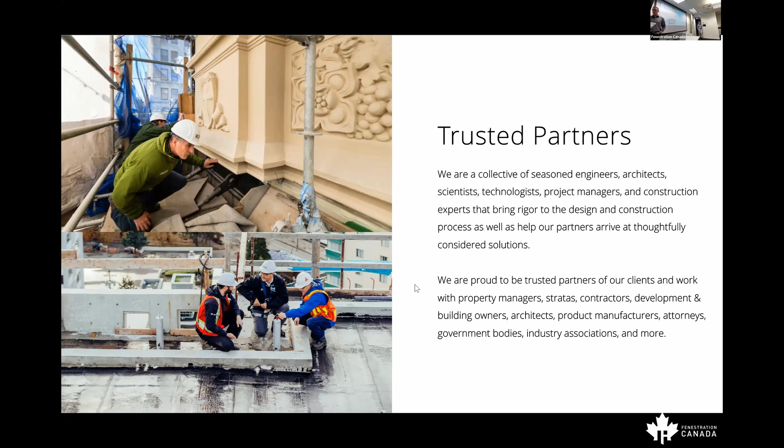And construction experts that bring rigor to the design and construction process. We are proud to be trusted partners of our clients, working with property managers, stratas, contractors, developers, building owners, and so forth.

Our capabilities range from historic preservation, deep energy retrofits, building enclosure engineering, structural engineering, capital plan reports, depreciation reports, energy and sustainability analysis, construction litigation, research and forensics, facade engineering, and facade structural services.

So we believe in innovation and expertise at RDH. For construction project management, we utilize a team of experienced construction managers and site superintendents to ensure the smooth implementation of a construction project.

For deep energy retrofit projects, we use our passive design approach to create energy efficient buildings, and a well-installed, airtight enclosure reduces the need for heating and cooling and improves occupant comfort.

We are regularly called upon to assess and clearly explain building enclosure and other building science failures. The high level of building science expertise at RDH leads to many requests for us to provide expert investigative reports and testimony as part of the litigation support role.

We collaborate with you on renewing specific building components or conducting targeted or full building rehabilitation and upgrade projects. We have the building science and construction management expertise to lead you each step of the way.

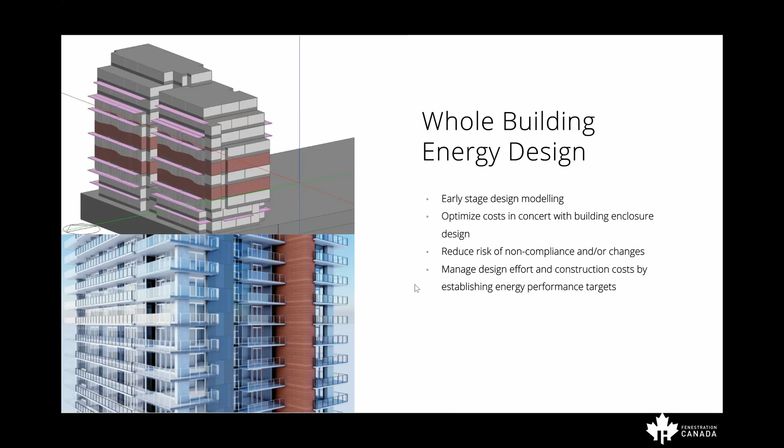RDH has dedicated lab spaces, which allow the ability to test and vet new materials and systems, as well as develop building-specific systems. RDH works with many of the major material manufacturers.

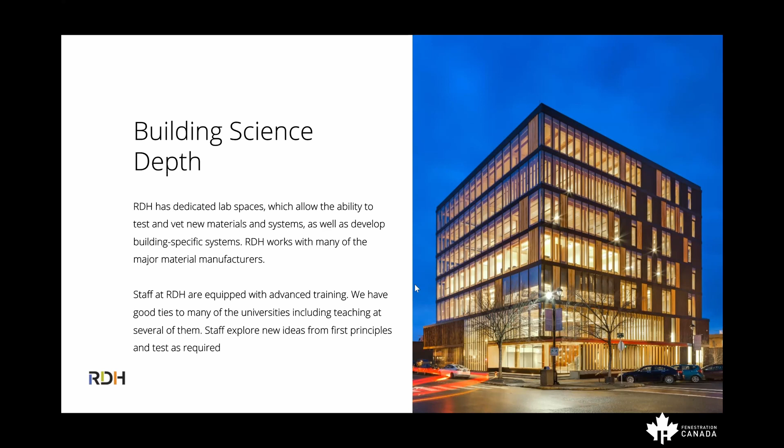Staff at RDH are equipped with advanced training, and we have good ties with many universities, including teaching at several of them. Our staff explore new ideas from first principles and test as required.

Whether the facade is built with cladding, curtain wall, glass, stone, masonry, or other materials, RDH offers consulting services and technical advice that makes architectural ideas and concepts come to life.

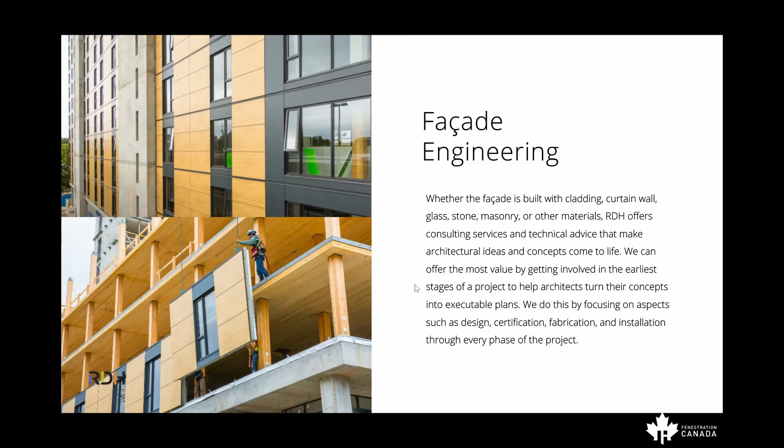We can offer the most value by getting involved at the earliest stages of a project and helping architects turn the concept into executable plans. We do this by focusing on aspects such as design, certification, fabrication, and installation through every phase of the project. We work directly with glaziers and manufacturers to undertake structural design of the fenestration system. We prepare structural engineering and thermal calculations, as well as review shop drawings to ensure compliance with building codes, design documents, and specifications.

We also help in the development of current codes and are authored on many of the technical guidelines and documents like you see here.

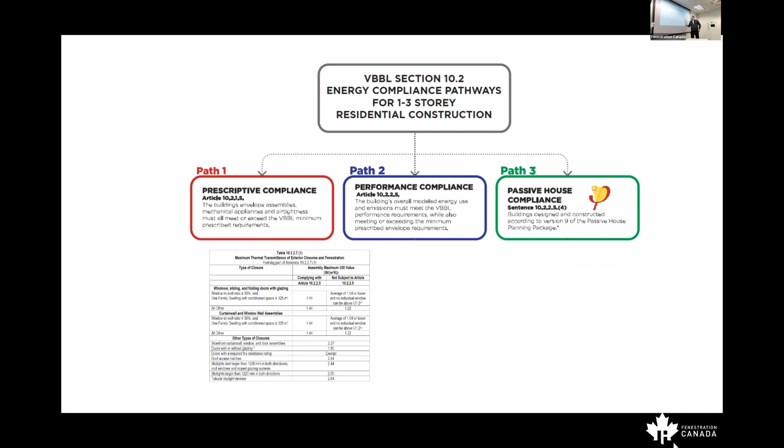So what do we do? I'm going to hand this section to you because this is where we get into the technical weeds, and as you guys will learn quickly, I have just enough to be dangerous, but we have some professionals. I'll just go back to one. Yeah, I want to go back. So go back. Nope. I just want to point something out. One more.

What is a conflict? What's the definition of that? A discrepancy, or when one's stating a solution or an option that's in direct opposition to the other. That's what I would say. So if you know what those two paths say and what their directions are to work, if you don't know that, there's already a conflict.

Like, I'm trying to understand when you would go, hey, there's a conflict here. If one contradicts the other. And that's kind of actually where this conversation starts, because as you're right here, the applicable requirements of Part 8 of the NECB and the City of Vancouver Energy Modeling Guideline, that was in the code in the 2012 code.

It was just in 2018 they added this little line. What I think unfortunately became the reality is people only read the City of Vancouver Energy Modeling Guideline and said, well, that's telling us what to do. So it's now the governing document. Let's forget everything else that is written.

And I said, that's like an iceberg. You're seeing the top of it, saying we're only going to look really hard at the top. As long as we're far away from the top, we're good. And then, yeah, so that's the problem.

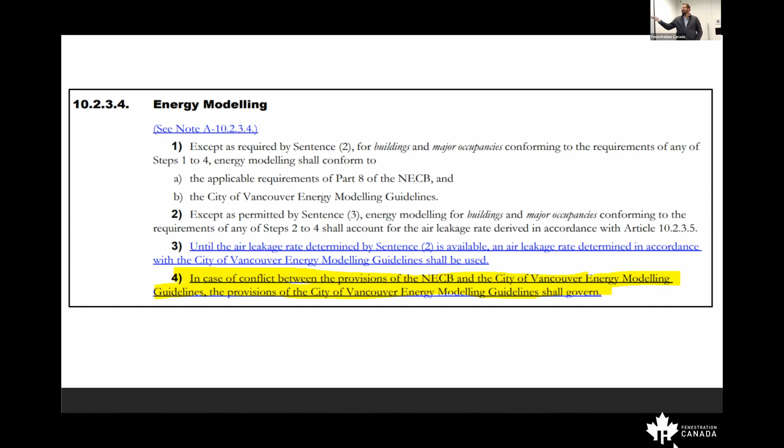In all reality, there's very little conflict, and it's trying to decipher what is the actual conflict that ends up happening for fenestration, because this is not fenestration alone. This is everything, right? So yeah, our biggest issue right here that came up for us.

So a little history on Layton. I know a lot of you know us, knew my dad back in the day. So in 2011 we had the first inquiry about thermal, one of the first kind of like, do you guys know anything about thermal? We started having modelers in 2013.

We eventually decided to become an NFRC simulation laboratory, so we actually do certification simulation for NFRC and for manufacturers. And it was this abandonment of the NFRC standard size. My thought was, okay, so everything points to things being NFRC or CSA approved. We've got buy-in from the good guys in the industry.

We're consistently fighting - might be too strong a word - but clarifying what those values represent versus other European models, or the results of those values. So we have buy-in for this, and all of a sudden the language is like, we don't care, get out of it. There were emails passed around asking for clarification from people in the city, and basically the city's like, well, we're not the law, we're not going to tell you about NFRC 100, but yeah, it should be size specific.

And so it really opened up this can of worms of, well, why do we do NFRC? And I think that's what got that first paper going. And then if we do decide that there's value there, which I think there is, it's validated, it's third party acknowledged, everyone's playing in the same field.

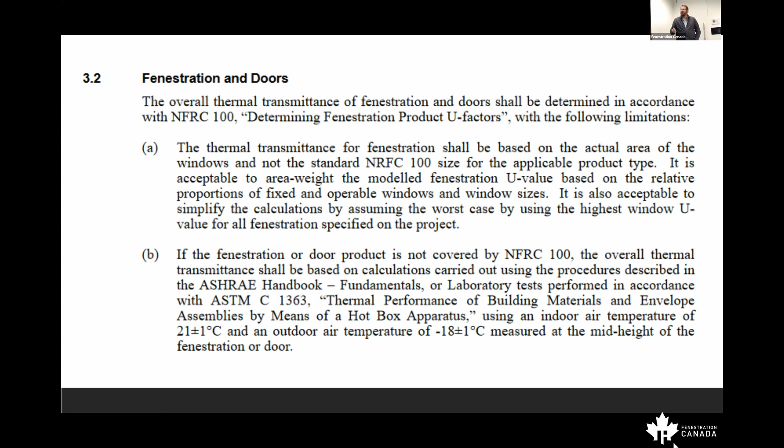We'll go through a little bit of the history of it. For those that already know everything, it'll be some review, but this really is a working paper that came out of the task group we put together with Fen Canada. So yeah, this made me laugh as soon as I dug into it.

And then I also did a review of what was happening before we had this huge explosion. I think what caught people off guard the most with the City of Vancouver Energy Modeling Guideline - I don't remember whose project it was, but I think it was Anton, Centra had a project in Victoria, and they're like, got to meet the City of Vancouver requirements. And he's like, it's in Victoria, why do I have to do that?

And then they brought up the BCBC, and it's like, yeah, by the way, it's part of code. You are required by code to meet this requirement.

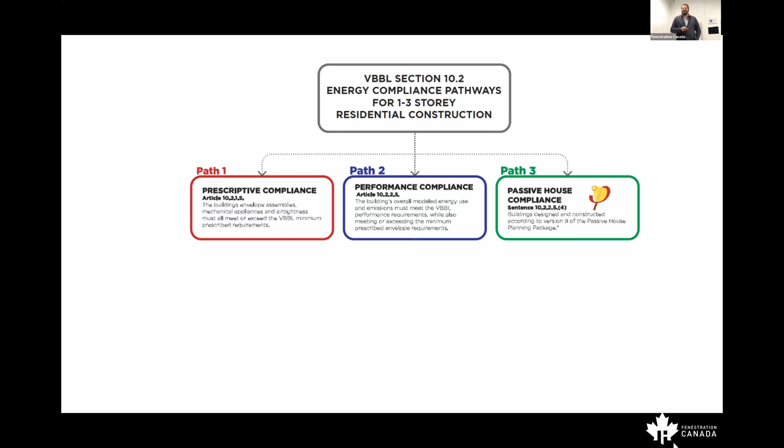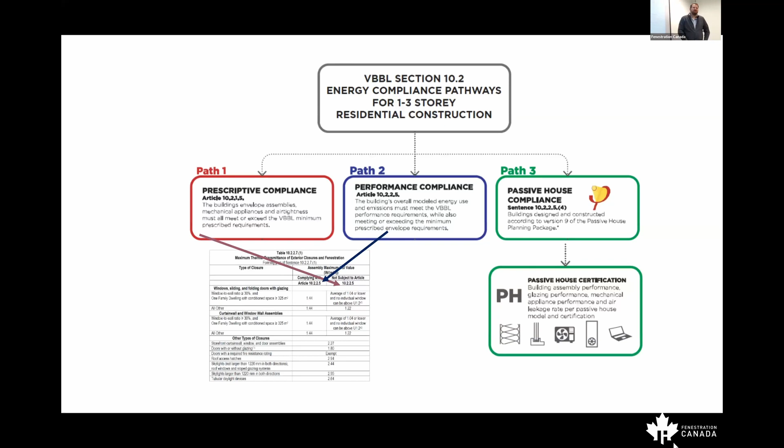So in the past, we had methods to pass. When I first got into the industry, there was what I'd call a threshold model, a prescriptive method that said, just tell me what my label needs to be. I want to install this window, tell me what my value needs to be, and we'll put that particular window in.

We saw triple glaze, I think in reality, become a very quickly adopted system because of that. It was like, we want to lower the overall labeled values so that people can install.

Then we had this performance conversation come in, and the VBBL really had these very clear paths. If you wanted to install a window or door, this was your threshold model. You could also use performance compliance, which was like the beginning or leadership of integrating with energy modeling. And then there's also the passive house route—as long as you're actually getting a passive house certified building, go ahead and use passive house certified products.

So we get to this, and all of a sudden it's just like, no, I don't care. I remember forwarding this to somebody, and they said the wording in VBBL is like proposed solutions in VBBL—it's not like this is the rule. So I'm like, so then the VBBL doesn't even comply to the City of Vancouver Energy Modeling Guideline? How is that the case if that's what they're putting out? So it was all really confusing.

And at the same time, I had this very interesting project that opened my eyes to how bad of an experience it could be. This is one of those West Van Part 9 homes, just barely under being a Part 3 building. Originally, I saw the actual original design.

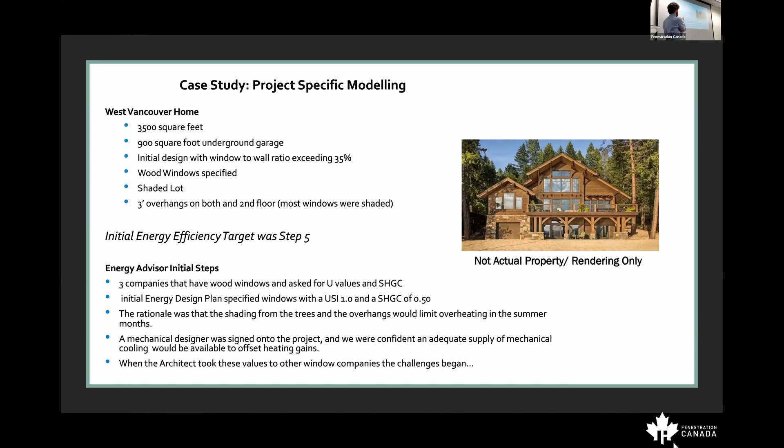Well, that's part of the problem—it was evident that it was based on some European modeling. One of the things I've talked to several people about, and it's not the purpose of this presentation, but separately, is why European values and North American values are so different—you can't get this seesaw effect. The way we use the metrics, as modeled in the NFRC program, and CSA being totally harmonized, they come down and go up fairly linearly.

So what this ended up being was several iterations of models, changing out glass. We have to get a higher solar heat gain—can we try double glazed over here? Just bent on getting this step 5. And finally, after about a year, this project is being closed up now—I started it May of last year. This was a Part 9 home.

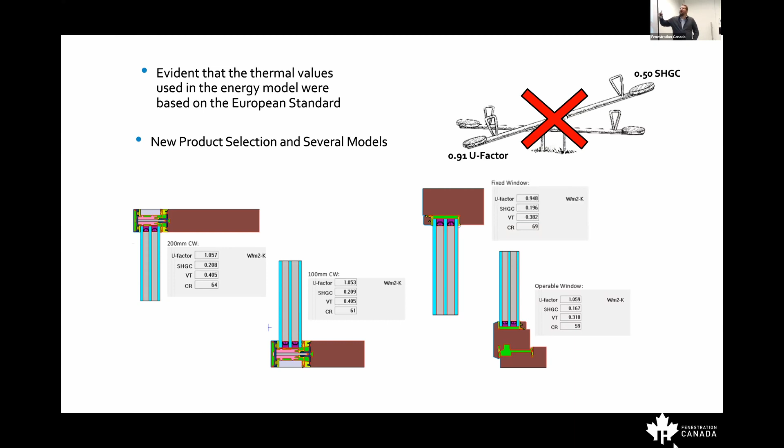And I just sat and I said, you either are going to lower your window to wall ratio, which they inevitably actually had to do, or you're going to have to change something in the envelope, because I can only give you so much. And they had these funky ideas with wood. I'm like, wood already performs really well. There's only so much you can do. And so to run all these models over and over again, it was several thousands of dollars and months of work.

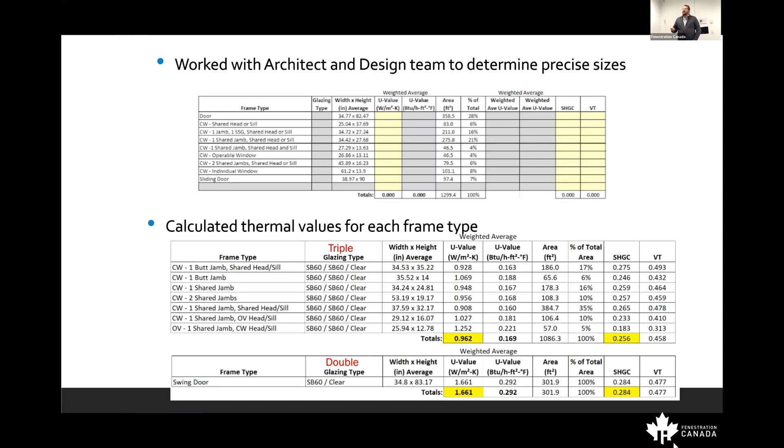And at the very end of it, maybe I shouldn't take their name out, but the reality was they couldn't even hit step 5. So all this work and all this stuff, and everyone was super excited for this home, and they all blamed the window people. Like it was our fault, you know?

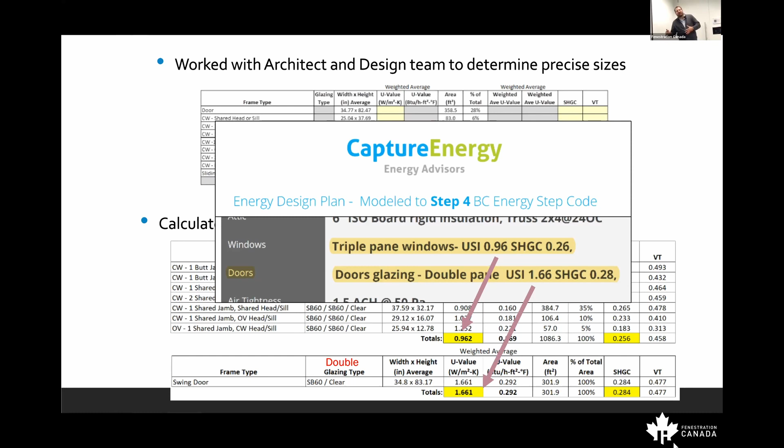And I came into this industry with the window people being blamed. And I am very defensive of the industry because it provided a life for me while I was a kid, and it provides a life for my family. And so knowing that there are interpretations that exist out there, that there are limitations to what NFRC can do and generate what it's providing, and also understanding, if we understand what it is and how we can use it, there are solutions out there. So that's what brought about this whole thing.

And then, yeah, go right ahead. You had a similar experience, right? Yeah, so comically doing this, a year of modeling, and just offhand, I don't know, I would hate to quantify whatever you went through for a year with them, but it's that. I'm confident somebody's just shoveling money into a furnace because they're dealing with the amount of models and remanufacturing and the time invested. And as he said, it's part 9.

So I've got an experience with a multifamily build where we had an energy modeler that, after the shop drawings are done, after everything was confirmed, we had already manufactured the windows, the engineer came back and said, by the way, we want you to project specific model these. That is bananas. We already had all the windows manufactured. And now you're coming back after having standard size modeling and saying, oh, by the way, it is code for you to have to model this per the project.

If things had gone poorly, that could have been an entire - it was a mass timber building, that was for us in the like $850,000 worth of window range. That's untenable. So we were in kind of this state, I think as an industry, we were kind of up against this wall.

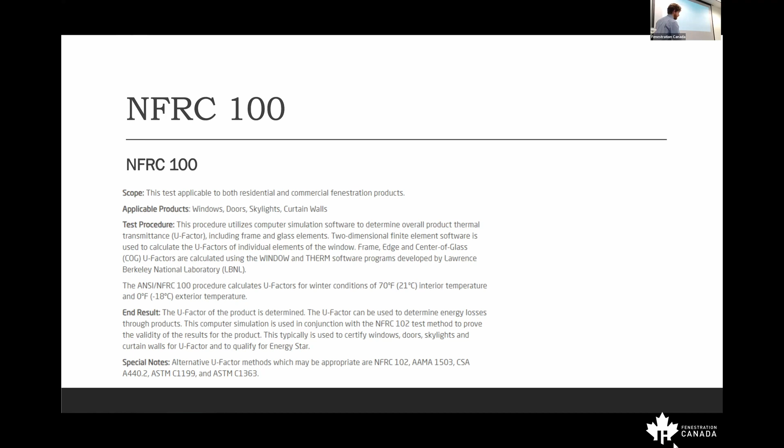And then for public comparison - yeah, I'll get there. The idea is, and we'll get into the next slide, there's a series of product types and their sizes that essentially you're doing the testing against.

So NFRC 200 is covering your solar heat gain coefficient and your visible light transmittance. There's also CR, or condensation resistance, which is a whole barrel of monkeys, but for the most part, solar heat gain and visible light transmittance coming out of NFRC 200.

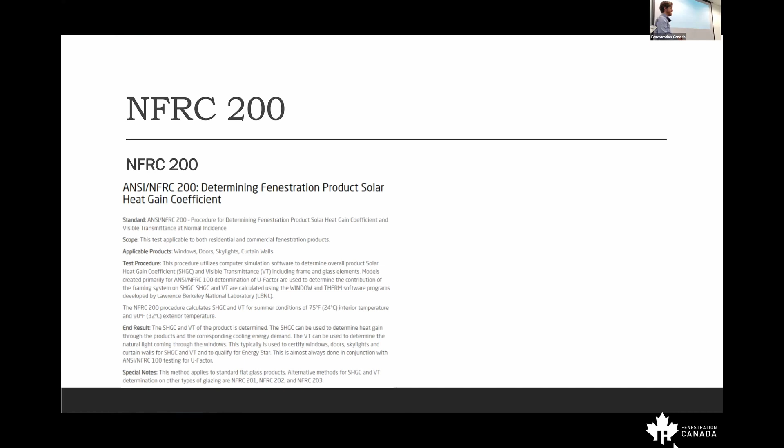I am way oversimplifying this, so anybody that wants to jump in and give more information, please. But the point is, as a manufacturer, what it provides us - and frankly it's a pretty unique feature when I look at the landscape of energy modeling - is apples to apples comparison. So like this conversation we were having about U-value and solar heat gain, as manufacturers we can talk apples to apples and BS check each other. Like, that's nonsense, that number doesn't exist, and if it is possible, prove it.

That's actually really hard when you're doing, call it size-specific modeling or project-specific modeling. You really have a hard time getting there. So NFRC provides us something fairly unique in that way. It's imperfect, frankly - it is not a great way to get to a very exact model. The Germans would be offended.

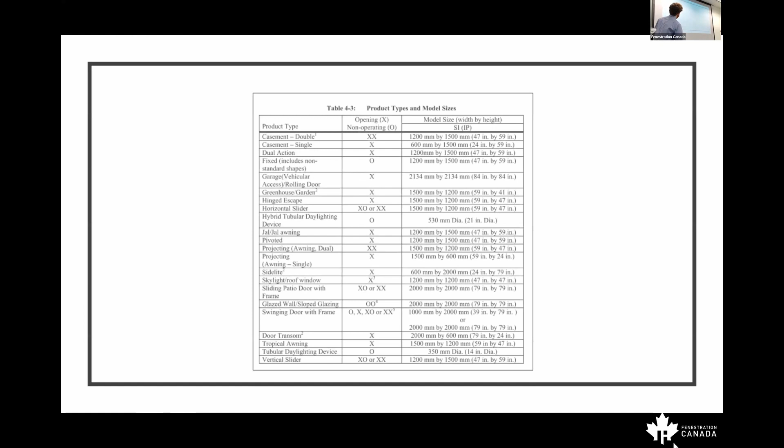Another piece for us is NFRC requires temporary labeling for our products. That, or if you've got a Part 3 building, you're going to need to use Part 5 in order to get the energy modeling, which essentially means you're going through NFRC modeling simulation in the background. And as I've said, in the next one you've got this chart which gives you what type of fenestration and their sizes that you're going to be doing that modeling to.

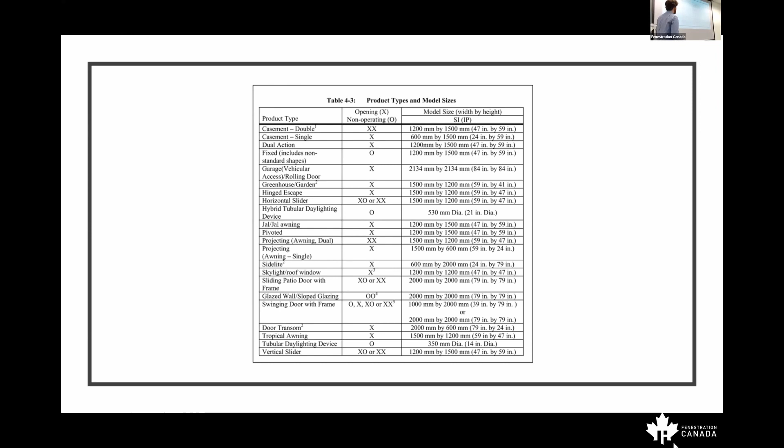So we're all playing on an equal playing field using NFRC 100, 200 within reason. There's definitely things that are imperfect about it, but again, it's a nice apples to apples comparison. But this is the problem - it's like when we're really talking about efficiency, Jomo.

Yeah, so we have a window, a certified window. We modeled it to the standard 1200 by 1500 size for a fixed window. And all we did was change the width by a little bit, and you get vastly different U-factors.

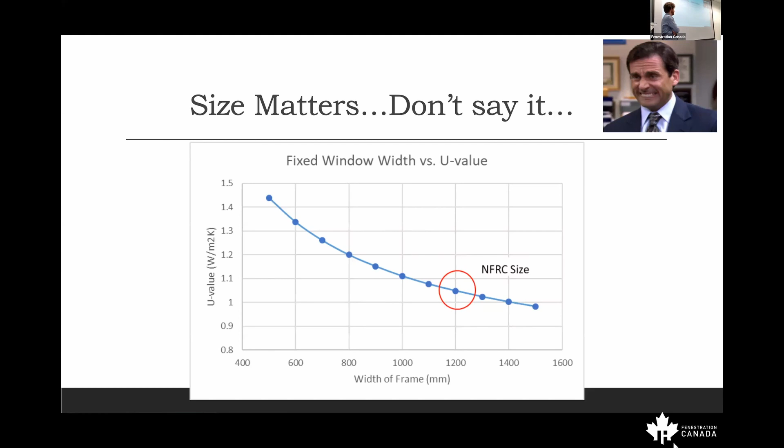And so I think it speaks back to the project you're on, it speaks to the project I'm on - you can't dump NFRC and think that we're still going to be able to regulate. Because what happened in the projects I was on was like, well, we'll just get a European window. And it was like pulling teeth to say, even if it's European, I'm still going to have to model it to NFRC standards. So I think what's so valuable about the program is not just the apples to apples comparison in the sense that the public can see it, but that everyone's playing in the same sandbox.

They are on specific sizes, but not the same ones. Even if a client says they get a European window value, that value is based on a standard European size - it's totally different. It has its standard size, but that's one of multiple variables. I can't just run a calculation assuming a European value applies to some other size - it doesn't. Right, okay, just wanted to clarify.

They still don't need code - that's right, it's super clear. At the end of the day, air and water too have to either have NFRC data, CPD numbers, or you need to go through Part 5 and do thermal modeling for it. The hot box thing is a whole other conversation - has that been pulled out? I remember we had that, but anyway, that's different.

There are some problems with NFRC. When it comes to modeling, I think collectively as an industry we're struggling with combination frames - how we're going to do average weighting when you've got operable, fixed, what prevails, is the weakest element the thing that prevails, what does the structural steel in the window look like. It's a whole can of worms to unpack how accurate this needs to be. That's the real question.

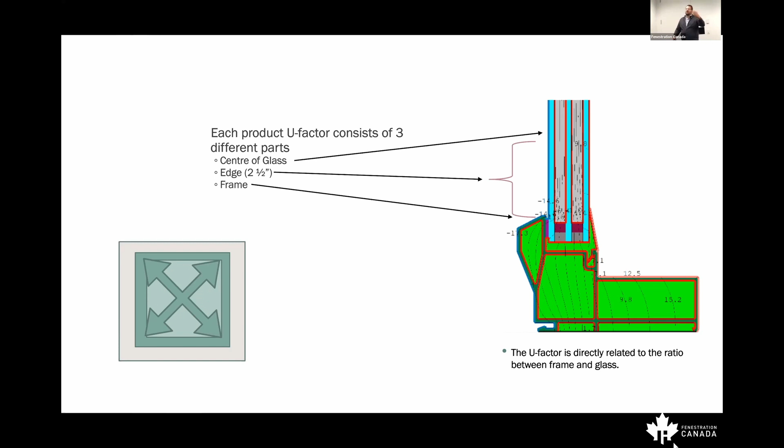So the isotherms themselves are showing you what's going on. This is just representative of the overall value, a representation of that size, because this is a model that just goes on forever. When you import it into the program, it basically sets the parameters of what that size is.

To break down what the actual program is doing, which will bleed into the calculator, it's essentially deciding, hey, it's going on forever, but I know there's this 45 degree. So I will break down all the area from the values that I need, and then I will generate a total thermal value based on all these components. That's all the math going on in the background.

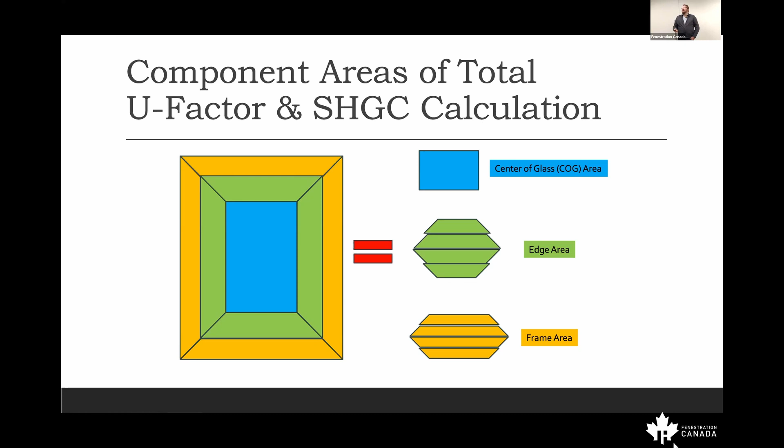Calculations are always great, but I love when you put them into a spreadsheet and they work. So breaking this down into math, that's just a simple way of looking at it.

And so essentially how we get those is, for this particular window, I created an IGU using the IGDB — oh sorry, I don't know how to... Yeah, Ivan likes your lab, guys. He says he's been here.

They're weighted — oh, actually let me just close my Teams. Gotcha. Yeah, all right.

The IGDB, I create it, and it does not have any size related to this value. It can be as big or as small — this IGU, or the center of glass values, are always going to remain the same. So basically, it's indicating these.

Thank you. Yeah, I know. He's not saying anything terrible. Okay, if anything comes up, that's the opinion of Ivan Chu and not Layton Control. I'll put it that way.

Yeah, so gotta do that legal, right? So we take that's generated, and then those that model. I don't remember whose this is, so I figured I'm safe enough to show it here. But we model all the properties, we assign as per the policies and procedures.

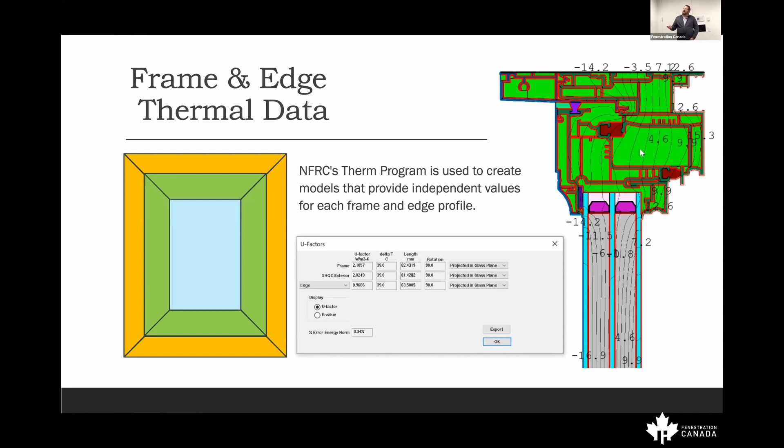So having this accurate is extremely important, and that's what gives you, once you run it with the IGU imported, the different values you need for both the frame and the edge. And then in the program itself, that's when size matters. It has sum of the U factor area for this particular jamb, and it spits out an overall value. So those that already know it, they know. This is just explaining the math that's going on.

At the end of the day, when a manufacturer goes through the process and gets an approved CPD, the labeling they need includes the IGU they put in and the frame type. So it's listed as a specific frame, and then it gives you the three values.

This is American, we actually use ER in Canada, so ignore that. That has changed. The NFRC actually has a tool now for ER. I believe in the update this will be dropped, but currently these are the 4 numbers we're looking at. So I brought this quote up from CPD 2.0 info.

My favorite part about this is that anyone can search it. You do not have to be technical. You're a building code inspector, you're someone who doesn't like the color of their window, you can figure out what it is. If you're a homeowner, you can check whether or not what you bought is what you were sold. It's verifiable, which also means there's liability on NFRC. We are actually given something back by saying these values are true.

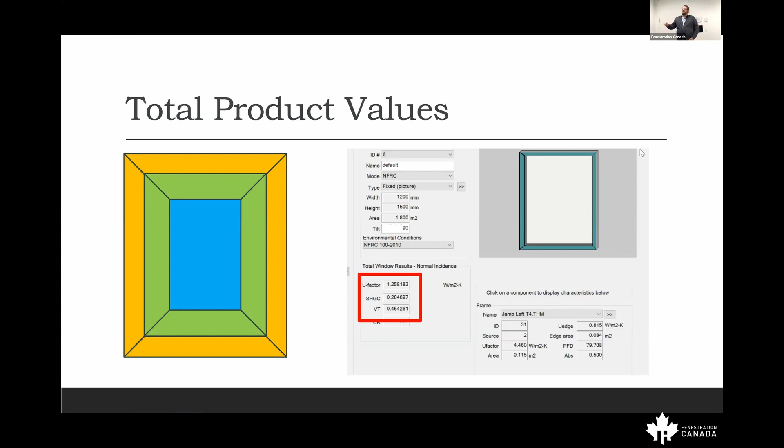What you don't get though, if I go up, is all of the information that you could use to just basically say, okay, I've got this, I know what frame I'm using, bam bam bam, change my glass. You could run this math by yourself if we had all this information. So it really only gives us the final number.

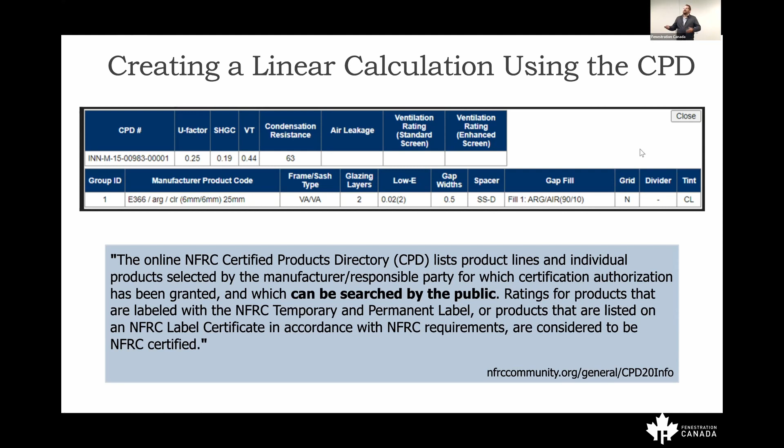So we thought, along with, and I'll get to Jeff's paper, I should have put it before this, is there a way to create a linear calculation using the CPD? Al Egalis was the first one who told me about Jeff's paper, and then I saw Jeff at the NFRC conference, and we started talking.

His original paper, he's changed some things. He has a new update he's working on, but at the same time, we're part of the task group with NFRC, and there's a meeting next week where we're actually talking about the commercial calculator they're building, which follows the same math. So there are several parties looking at this the same way.

But from the CPD, like I said, we have those based on the standard size. So we know the size it's being modeled to. We know the total U factor, the total solar heat gain, and the total visual transmittance we're having. It also gives us the center of glass. Then from the drawings, this is one of yours, Adrian, I can figure out what the site-specific average size is, or every single window size, from the drawings, from order sheets.

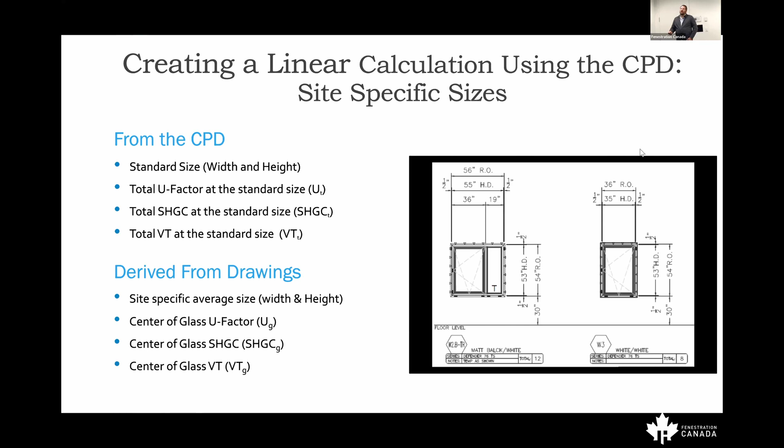Some people use Google Smart Sheets, and they list every window they're ordering and all the sizes. It's quite easy to get that. And then I also know I can confirm the center of glass value from those drawings. But it leaves us with these unknowns of what do we solve.

One of the biggest problems is we don't know the size of the frame. Because we don't know the size of the frame and how much that's going to impact, we know its center glass can go forever, 2.5 inches once we give the perimeter size. But how much is the frame cutting into the center of glass? I don't know, it doesn't tell me. I don't have that information from the CPD, which prevents me from knowing the U factor of the edge or the frame, and the solar heat gain component.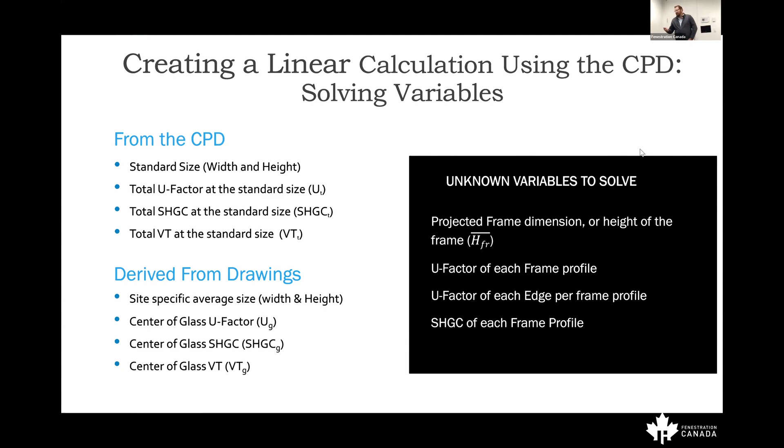Like I said, Jeff's paper here basically says we can use these values by doing simple algebra, finding out what the unknowns are, figuring out the knowns, and then calculating so we can figure out the frame data to then run an analysis.

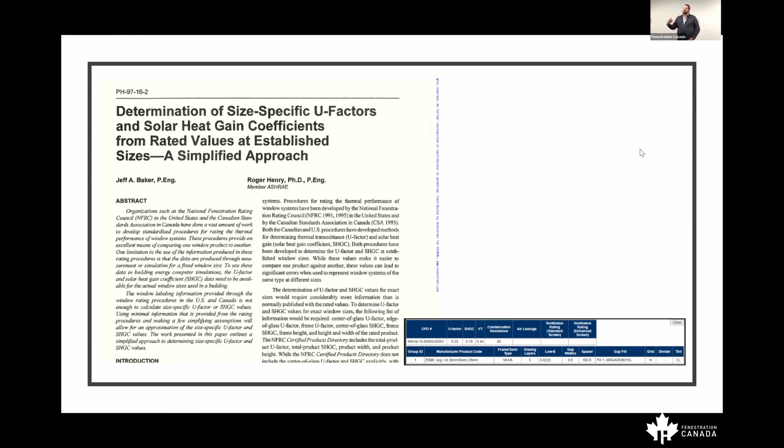Now our only variable, because we solved everything, is changing the size. This was released in '97, so obviously I'm going to have an update anyway. Some of the procedures in which NFRC did things have caused an update, but we've worked with him to verify the modern calculations. Because we know the known size, that's what allows us to calculate the unknown size.

But this is like our little secret in the bag.

What's that movie where they solve the German Enigma code with Cumberbatch? Yeah, no one remembers the movie, but we all remember watching it. Yeah, it's like the Enigma machine. Yeah, this is like the 'Heil Hitler' that let them solve it. The thing with that Enigma machine is they couldn't figure out which items, and I'm going deep now, but the symbols represented different words. They figured out that at the end of everything they put out, it said Heil Hitler on the bottom, and it gave them enough words or letters to be able to read the whole thing. So this is it, this is our little Enigma solver right here. Rosetta Stone, are you comparing yourself to solving it? Yes I am, yeah, Benedict Cumberbatch. We'll go with Benedict because his career's on the up right now.

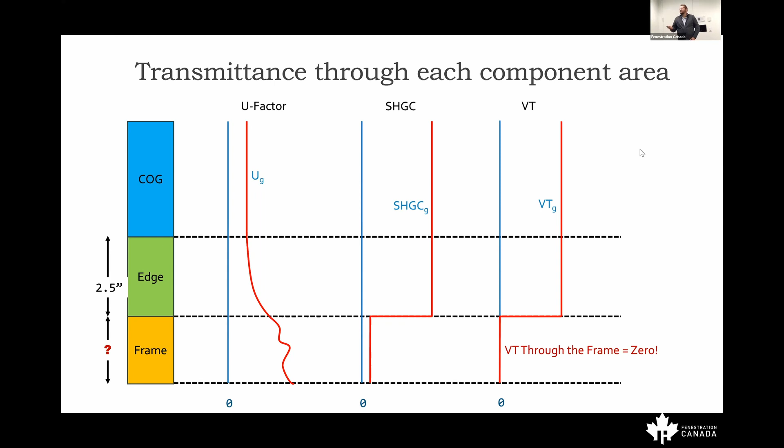So this is essentially the math behind what I'm explaining, and we're going to walk through this. People smarter than me put it all together. The reality is, let's assume, because we know the set size, this is a fixed window, then we know that VT total will exactly equal the VT of glass. But we know there's a frame, and that frame is going to be 0, which means the VT total will be less than what VT glass will be, because we're losing some of that overall area. And because we're losing some of that overall area, we can actually solve what the fractional frame fraction is of the impact of that overall area, which allows us to have an average frame height.

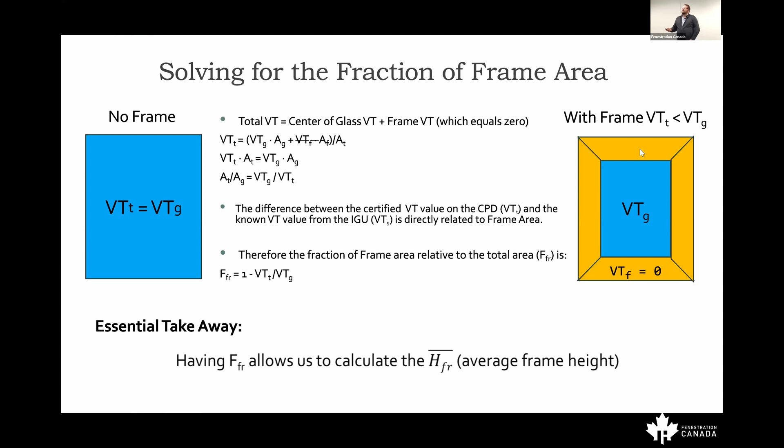Now I say average frame height because it's looking at this all around the perimeter. If you have a door that has a really wide bottom rail, it's going to average it out with everything. But as far as NFRC, that is irrelevant, it doesn't matter, it's running the program. If I went back up, you'd see the frames are cut. It's just all based on the area impact, so it actually gives us everything we need to solve.

The only difference is it doesn't separate U edge and U frame, it combines them. But that's actually okay, because even in the NFRC program, what does it do? It combines them. So we're able to make it so the only thing we have to change in the linear calculation is use those values and now change the size. So essentially, the projected frame dimensions are solved, and we have the average frame height.

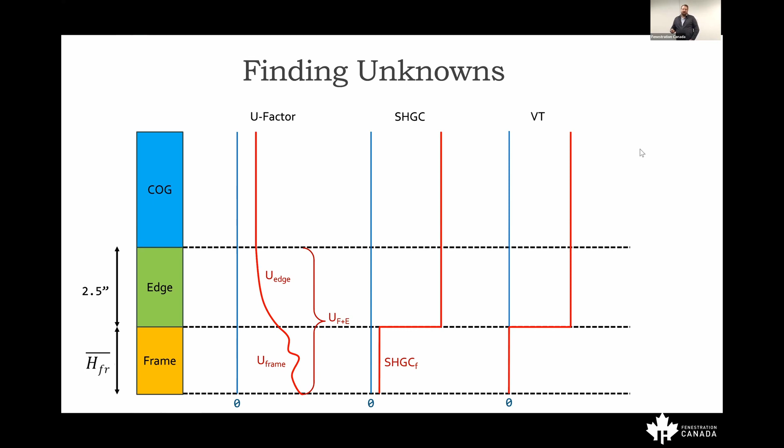We have the average frame U-factor and edge factor combined U-factor, and we have the average solar heat gain for the frame profile, because we already have the solar heat gain and the VT from the IGU itself, the center glass. So there are some potential sources of inaccuracy, and this is getting way down into it.

The CPD only rounds to 2 decimal places. Oftentimes I get asked, what if my window is 1.226? Does that mean 1.22 or is it now 1.23? This is your 2 decimal places, that's all you can check. I like telling the city it's 2 decimal places. Have a good time.

The variation between frame widths around the window - that's talking about how it's spread around the aspect ratio. So there is some potential difference, but it's too far down, it's gonna be thousandths or hundred-thousandths. So it's not even something I'm looking for, I just know it's a possibility.

And then this is actually built into the THERM program. Essentially, when you import glass into the program, if it's a curtain wall, you set the height at 1900 millimeters. If it's a fixed window, you set it to 1400. It's just an import. I also haven't seen a discrepancy yet - we're trying to run it, but it's something we know the program is just slightly different on.

But at the same time, I only bring it up because of this group, and I know that we're in the thick of it. So when we want to release an actual calculator, we want to be confident, and someone will say, well what about this? Be like, it is so insignificant, don't even think about it, especially when you consider this first one. Well that first one plays a critical role - huge - in where we're heading in the conversation, which again is going to what is going to be accurate enough.

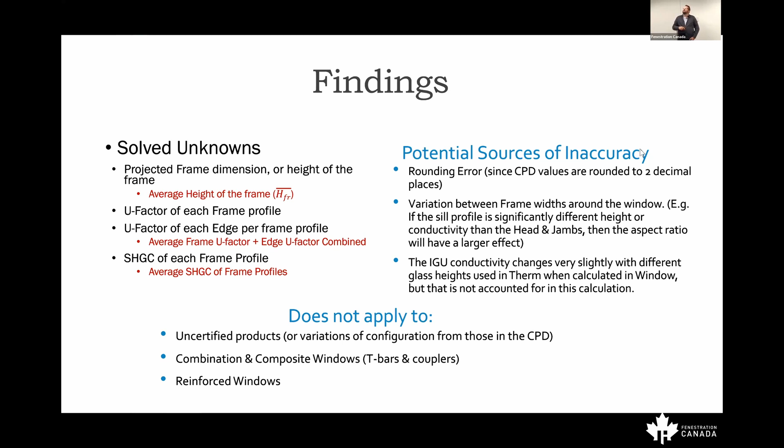So the real question is this precision versus accuracy, going back to how we used to do things in our idea, because there's several of us on staff who do this. We always looked at this as a kind of order of operations - like, hey, I got this project. Okay, what are your labeled values? Oh, they're all below the threshold. Great, have fun, don't talk to me, do your job.

Then they'd say, oh I have my sliding doors - path B - my sliding doors are just above the threshold model. Okay fine, I'll take all your labeled models and do a weighted average, because your sliding doors are only representing 15% of the whole project. Let's weight it out, and then we know overall you're below the threshold model.

Or, hey I've got - yeah that was it, that's path B. And then path C was, okay I have some weighted, some labeled, or I'm totally importing - I have a whole new design that actually falls outside of NFRC, or a new configuration - we have rake windows, triangles, all sorts of stuff. How do I get this passed? Okay, we'll do a simulation for you, we'll run it. Obviously most time consuming, most expensive, least common, and then it's all on the manufacturer. Good job for getting certified.

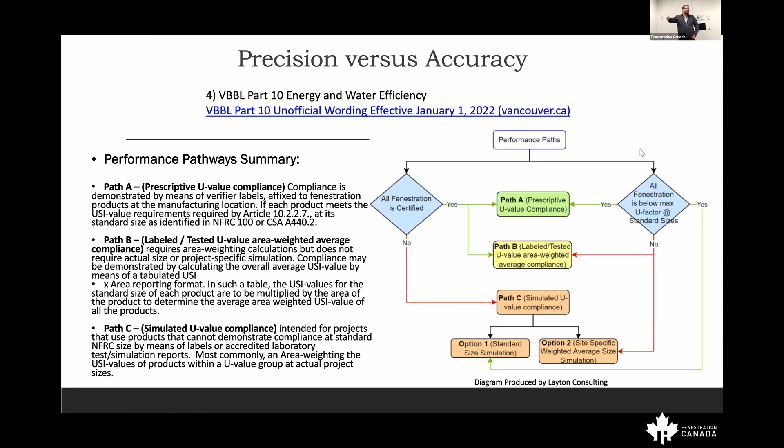And it was not like there's no precedent there. Oh, I don't know why the colors didn't show up. Oh, I stole this from another slide.

So I said something really profound here, I can't remember what it is, but NECB has different compliance paths. It goes back to what you said, Terry. We didn't just abandon NECB all of a sudden when you guys had compliance paths built in there, which we took the same pragmatic approach when you needed to meet this or ASHRAE or whatever we were going with.

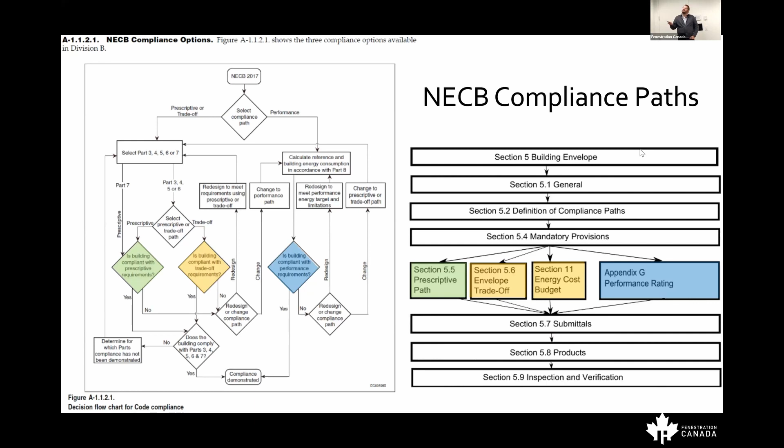I know what those are. I can look them up in the window program in the NFRC program, or a window or IGU manufacturer could provide that data for you. So we put that in there. And these are just, he just wanted to compare different sizes outside of the standard size and say, what would we get if it was size specific? And how different would that be if we just modeled it with the calculator?

And so some of these were modeled to these sizes, and then the other ones were using the calculation. And the discrepancy is totally insignificant, 2%. And so then he was really concerned on some, like, one thing he didn't have was commercial product, aluminum product.

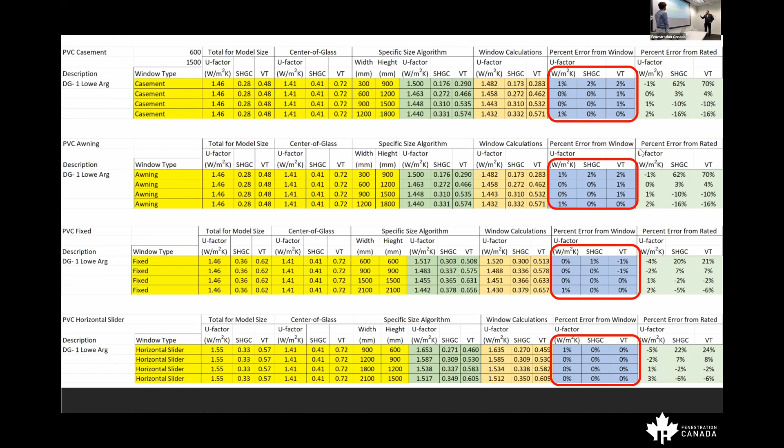The 2% is from someone actually modeling it totally to NFRC standard. For Jeff's, these were all submissions that he did to get their CPD, so he's actually comparing exactly the CPD to what he modeled for CPD. Now, I don't have one for curtain wall and window wall, but I ran through it, had it verified by somebody else, like yes, this would match exactly how you'd model it for CPD. And that was the same, the error was consistent is what I'm trying to say.

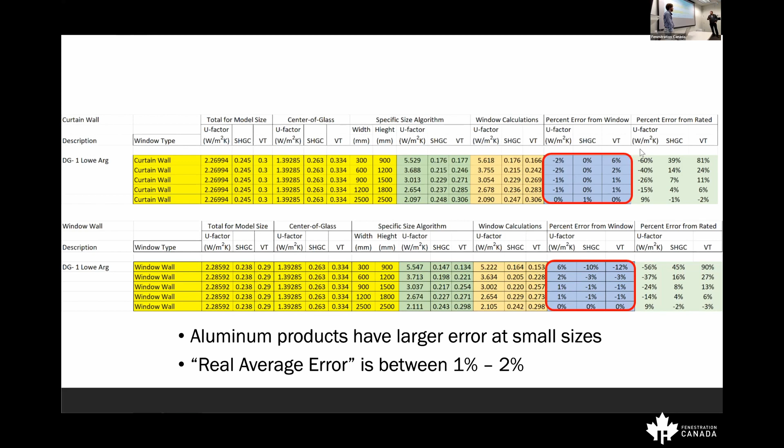Yeah, the hope is to have someone who's like, yeah, I will do this. Traditionally, part 3 has not gone that route, but NFRC is capable of doing it and they want to do more of it. And so the one we'll go through, we had a project where we had to get project-specific modeling for, and so we're running essentially that project-specific modeling against what the calculator is spitting out.

I think what was really, anyway, I don't want to take steam away from that. Yeah, so basically what I came back with was this whole old VBBL compliance path B, which I think I'm like the only one who uses it. Everyone else is like, oh, it's the NFRC calculator or whatever. It's just like, hey, we can generate size specific, but let's use the CPD information, let's use the labeled values to get it.

So we started a draft because the City of Vancouver recognized that it needs updates, and several parts are under review. We're hoping that NFRC actually generates this document, so it's not just independent. I know Jeff is looking to do it, but if it has to be a FEN Canada initiative, it will be to basically say you can generate size specific values without having to do a full energy model, which goes from several thousand dollars and several days or hours to knowing which system you're using, the glass you're using, and your sizes, down to 10, 15 minutes to maybe an hour of data input into a calculator.

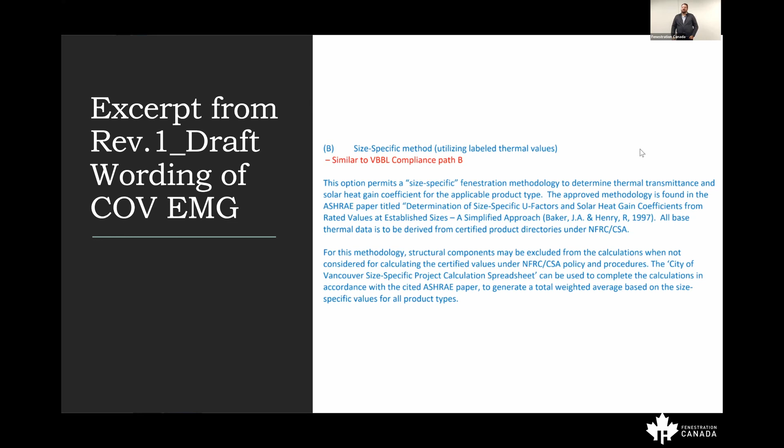This is just explaining, I don't remember our break point, but Foo's not here yet, so pretty soon we can close. My thought was that we can get through a little bit more of this and then maybe do a next quick section. Okay, I'll stop after this one.

So this is just explaining a little bit more of how we generate a final number, because this actually brings us to that original problem. One interpretation that came out was, well, your worst case scenario is the one I'm worried about, and now I'm going to apply your worst case scenario value to everything. That is crazy to me, that arbitrarily some consultant picks a casement window and now starts applying that value to the whole envelope.

So what we had already been doing is, this is just a project where we figured out, okay, we're using all these different systems. This is our glass, and we inputted it into a calculation. This is before Jeff's calculator, we were already doing this. So I only have to model this once, and I only have to put the size in once in the NFRC window program. I just put in these average sizes for all of this type of window and that type of glass. If there's two types of glass, you'd see CS77 fixed triple glazed, and CS77 fixed double glazed, or whatever it is, changing the low-E coating. Then I'd get an average for each type and grouping type with glass and frame, and the area, the total area contributing to the total of each of those. That multiplies your overall values that are based on these.

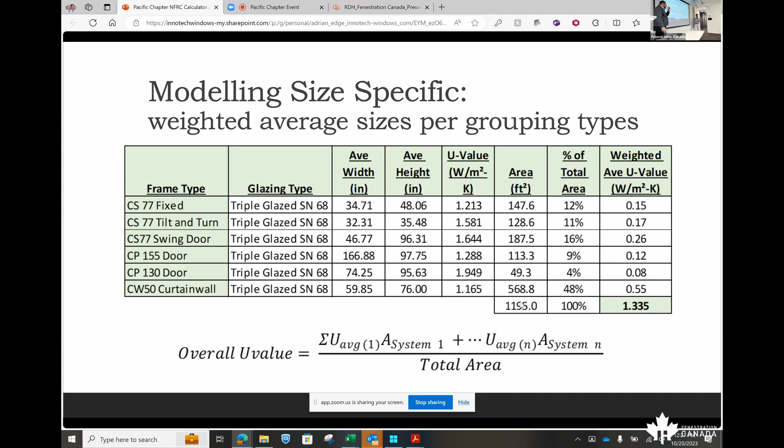Yeah, sounds good. So we're going to jump right into the calculator. So when we first got this - when we first got the program going, I'm like, oh, I've got a job I can do. Obviously I've zoomed out far enough, I was supposed to cover those.

Okay, so you just saw fixed. But I basically modeled this according to... this is not a certified product that I had. It might be, but I didn't have access to the models that were done in the certification, if that makes sense. So I've modeled it, done everything I can to make sure that it's NFRC size.

And I've already figured out that, well, this is how we used to do things. So this project was done, it was presented, here's your overall values. They were super happy, job was completed. And I'm like, okay, I wonder how close I can get with this calculator.

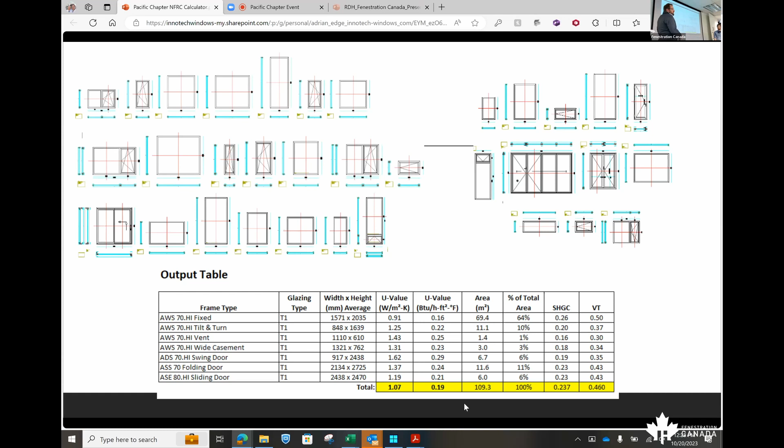I basically want to see how quick I can break this calculator. So when we're walking through your job, you'll see there's the deliverable page of the spreadsheet, and this is in the background. So we essentially split it up by its type: fixed, tilt and turn, vent, casement, I think there's doors and stuff. And then I just inputted, with the drawings, all the widths, all the heights, the quantities.

And I even listed every single window, so that's another kind of check and balance, if you're like, what's going on here. And as you can see, some of them, this fixed and this tilt and turn, they're part of the same window because they have different profiles as it would be modeled by NFRC.

These are two separate windows. So that's something to keep in mind, that it's going to run the calculation as if they're two separate windows, even though they may be combined with the mullion.

So that's actually a great point to make. Like when we get to my windows on this side, if we're pulling apart the operable unit and the fixed unit, both of those, the frame overall will have steel in it. So for our product, that's kind of how we deal with that. But if I pull out the operable window and the fixed window, I actually now have additional steel that I wasn't accounting for.

That combination right here, I'm actually being penalized a bit by this system, but I think that's still part of the accuracy, precision conversation, the accuracy question, and where are we willing to allow that to exist. So I split it up exactly as if these were NFRC models, and I only changed the sizes.

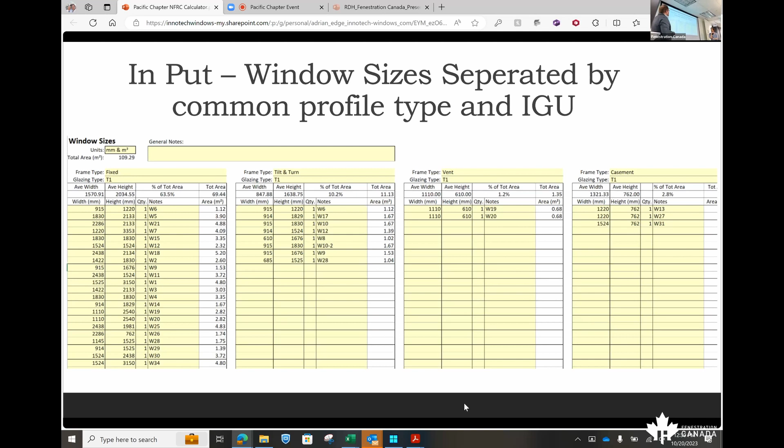And then I also followed the old performance path. So this is what we modeled when we modeled it as if it was path C. So I'm modeling exactly how I would if someone came to me and it's a European product, they're like, I need NFRC.

And I say, okay, I'm going to follow the policies and procedures. I'm going to draw in everything, I'm going to combine it all and give you one value. And this was just like, well, let's pretend that these have a CPD. So I modeled them to the size that they're related to at their size. And there's some discrepancy. So this was the old path B, in the case that, hey, I just want to use my label size and just change my weighted average.

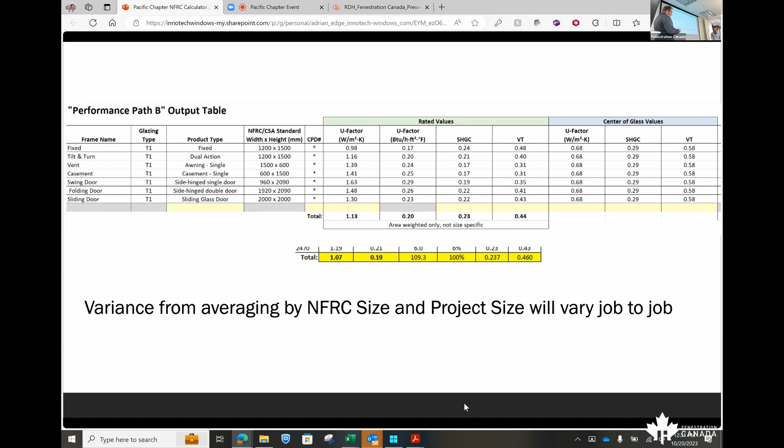So the size doesn't matter, it's just the area of each different profile. And there's a difference, not a ton, but there is a difference. And based on what your product type is and the size of the windows and the area overall, you're going to have significant difference. So I can appreciate that just using your labeled size and then doing a weighted average is inaccurate. And I think that was something that was meant in the City of Vancouver Energy Modeling Guideline.

So then I ran it through the calculator, and man, was it ever good. This number took 2 days, and I think cost the client like $3,100. And this took 15 minutes, and partially because I already had the sizes. If I had to find the sizes, an hour. So the power of the tool right off the bat, I was like, okay, I like this model.

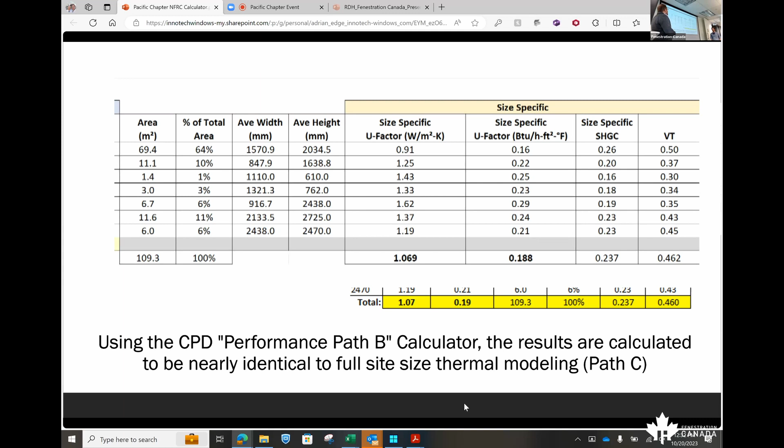Let's go with this, because I don't like this so much. Yeah, there's a lot of work. And if all that work's already done, where I don't have to model, and I'm getting that accuracy, then that's pretty amazing. So this is to show you what the front page looks like.

The way we've designed the calculator, it's still, if you have labels, it actually, as we've designed it, shows you what it would be if you're just averaging your actual NFRC size. And then what is it when you put in the actual sizes, when you take the sizes into account.

So it's still weighted average, but this is based on the size, and this is just based on the area. What I like about this model is it's partially another check and balance, but also because it's showing, hey, if I just average my labels, what's a realistic thing I'm getting?

Kind of like the EA model. And then, okay, now what's the discrepancy? We're essentially teaching industry, teaching the stakeholders getting this information, what kind of window performance they should really be expecting. I don't ever want to see a 0.65 solar heat gain requirement again, and I've seen it on 2 jobs and almost erupted into colorful language.

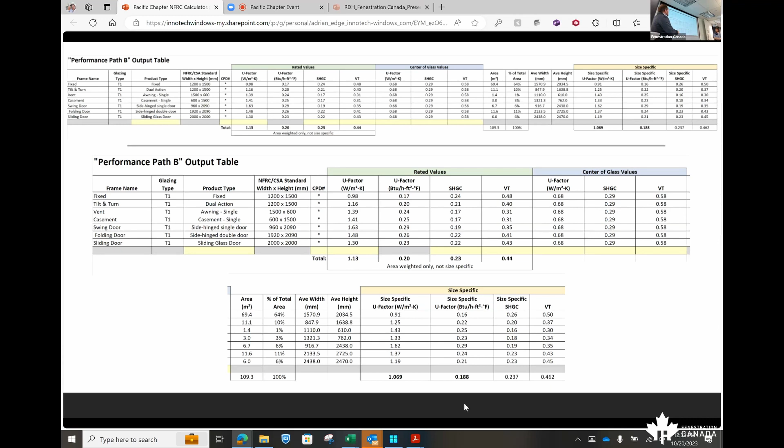So yeah, this is basically split so you can see it into 2 quite clearly, and you can see the discrepancy. But this is essentially the end deliverable, based on that size-specific number and just the average of the rated values. Okay, cool. Where are all the inputs?

I'll get to the issues first. One we already identified: this is a combination window. So when it's put into the program, even though I modeled this half mullion here and half mullion there in my actual model, when we put it in the NFRC calculator, this is a full frame and this is a full frame. But what's so interesting is it almost accounted for that margin.

Here's another issue: I've got this one swing door. Why did it account for that margin? I honestly believe NFRC essentially understands that the discrepancy, when you cause over the whole project, is so low that that's why they picked certain sizes and certain configurations.

Like, a triple slider is not an option in NFRC, it breaks it down to a double slider. Yet in my area I have to account for all three. So I got unique in how I separated this one and separated this one in my size calculation to account for the total area that's representing.

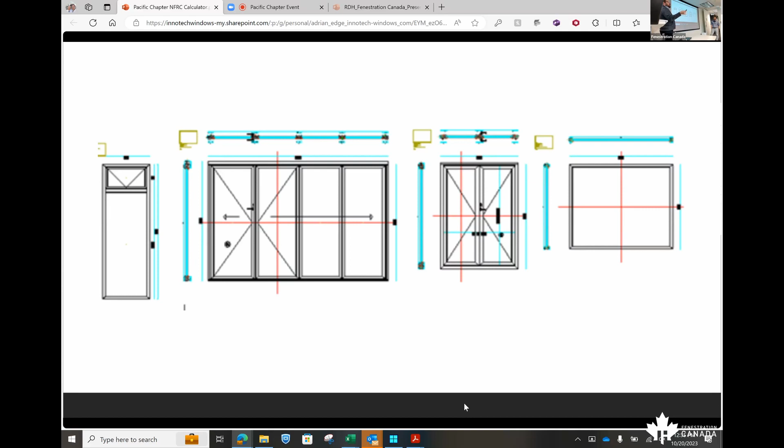So this is a swing door, and then I have this in as a double door, and then I also include this as another singular part of that. Now it all worked out in the calculation. So that's one thing to keep in account.

And then here's kind of the ongoing conversation we continue to have: we have some reinforcing in here. Where does coupler T-bars take into account? In fact, even NFRC has confusion with the difference between a combination and a composite product. Their own clarification wording I do not like, because I walk away reading it being like, I don't even know what I just read.

Essentially, I think it's because they're like, look, we're just certifying, and industry has kind of made some decisions. The old way of doing things, for instance, this window just got its value assigned on the worst performing window. And I don't think that's right.

Now the calculator's accounting for a casement here, a picture window here, picture here, all full frame. But in some ways, it's kind of accounting for some of this other stuff, which NFRC, its own program, is doing on its own. So some of this is more study, research that has to be done.

If there's any plea to industry, it's if you have certified product, even if it's an old job, let us get in there and try it and break the calculator as much as we can, because the more we can prove what this frame combination actually plays in the calculator, the more we can make the linear calculation simpler and simpler. So what would be helpful as you are playing with this is when you see combinations that messed with the calculator in a weird way, start asking for more projects.

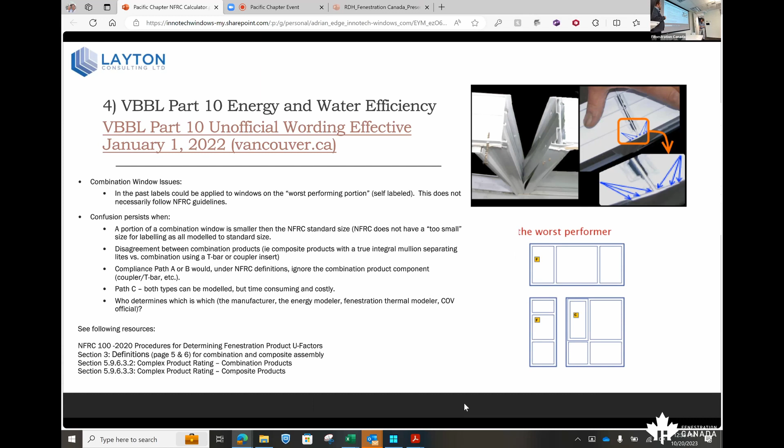Let's come back to this question as our final wrap up, because we obviously continue to beat on this portion of the conversation.

Funny conversation, actually - when we first came to the project, we kept calling it Project X. Xwemelch'stn was what I got from the project manager, and when I got on site we had indigenous workers there, but still no idea how to enunciate it. I keep calling it Xwemelch'stn to the best of my ability and make sure it's spelled right in every email, but I call it Project X when nobody else is listening. I'm sorry to any First Nations I might offend on this. Anyone been to Squamish?

So this is a multifamily project we're just wrapping up. As far as I'm concerned it was fairly simple, the configurations weren't crazy. Most of it gets into like 6 foot by 4 foot type openings. There's a handful that are a little bigger, but not really - I'd say this is a pretty easy project.

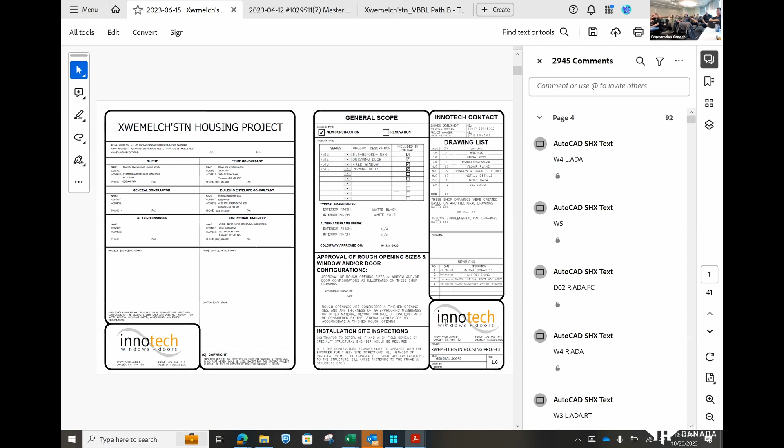This feels very vulnerable - shop drawings are constant work in progress, everyone's is. So this is, window and door schedule, pretty common I find for the industry. I sent over the drawings to Layton and said I could use help modeling this so that I can provide something back.

This was one where I should backtrack and make sure there's honesty on the table - this was not manufactured yet. Capstone was the project in Kelowna, that was the mass timber building. This one was simpler - we were already in conversations with them, we already had the shop drawings done, we were at production phase, and then I got the call.

Were they asking because your NFRC values were off? No, they lined up just fine - it just didn't work for the building. So we were running into that. That's a big portion that was bugging me - we were meeting the project criteria when we got the tender, but then the modeler's like, it just doesn't work, I need you to go fix your numbers. Can you improve your windows or fix your numbers? Just fix your window.

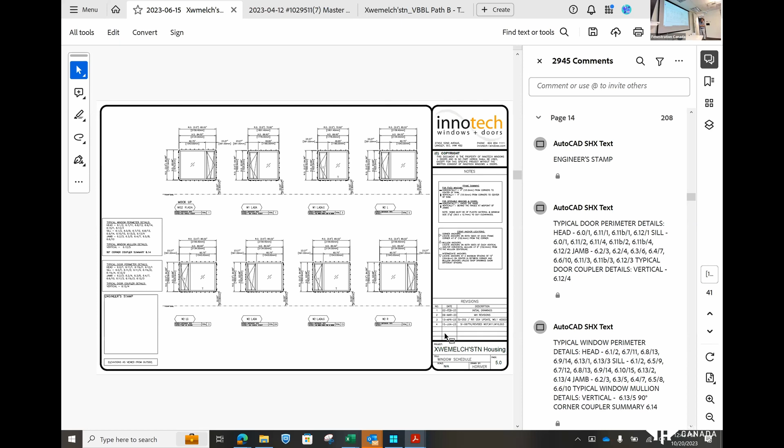What's amazing is I ran this without doing thermal. You gave me your CPD numbers. I got all your areas, I got all your quantities, and I checked your windows. That's exactly where I started. I pulled up window, I created the windows to get the window data. Because if we pull up the CPD, I think I have it.

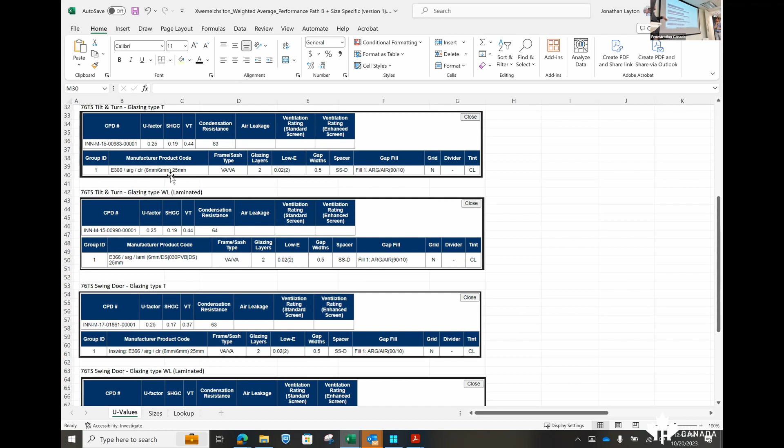So for those that have not seen the program, this is the window program, sitting in the background, that does the NFRC stuff. So you had 2 different window types: one E366 low-E coating on surface 2, and then clear, and then one with a laminate inner layer. I just built them in the window program, plopped them in, so then I got this information, the TVIS, solar heat gain, and the U factor.

And then I went back to your drawings and we put in here, I just started off. I went over to sizes and I put in the frame types, and I separated them because you had 2 different glazing types.

So if I go back here to the first page, the yellow is my inputs. My first input, okay, I've started this off. Then I pick what the product is.

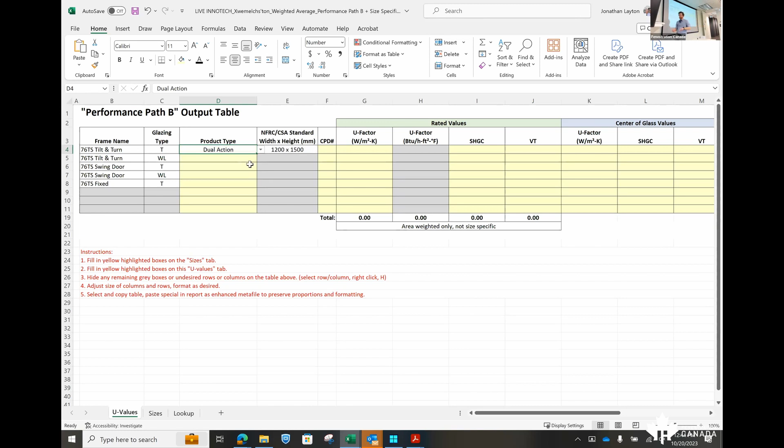Whoa, that's way smaller than I thought it was going to be. It's okay for us to increase that. There you go. Dual action, how do you do that? Okay, thanks, there you go.

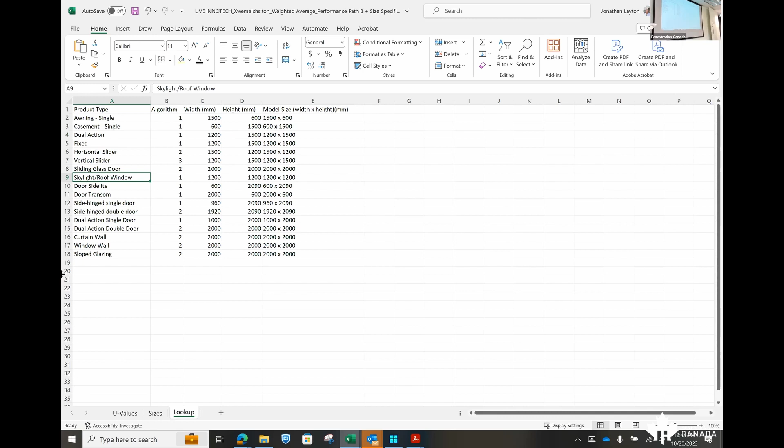So I went down and I just selected, because in the background, even though this is just sitting here as a table, it's actually pointing to all the calculations. Remember, we need those standard model sizes to then make it a linear calculation, because we're basing the information on those standard sizes. So I go in here and just select what it is, dual action.

Oh, wow, oh my gosh. That's terrible. I can't help you fix that. This is why I hate doing thermal modeling, just sitting here all day. I'm just kidding. Oh man, I can't even. Okay, you get the point, right? Everyone's on board with me.

We're only doing this because we've got the next sheet that already has most of this put in, but we wanted to make sure you guys could see the actual input.

I can't even find the swing door at this point. Oh, there we go, side hinge, single door. There we go, so it's like starting to build it in there. Thank you for your sacrifice. Yeah, thank you, that was rough.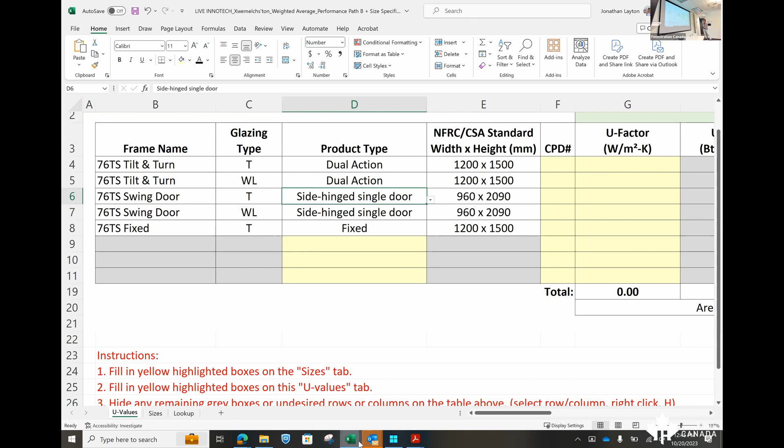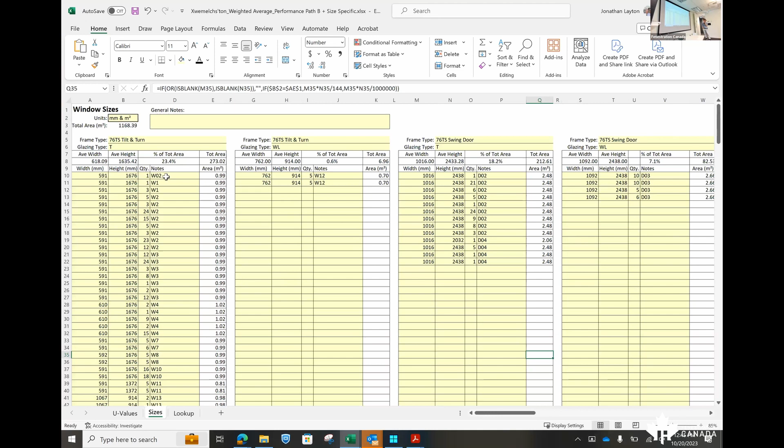Going to this, so then I just start exactly taking from whether it's your window schedule or you give me a list, I use the drawings. I literally just put in every single window and assigned it its number for the quantity and then the window type. And I wrote in your CPD values for verification that that is the window type. And this spit out this average, like I said, that is only based on this size.

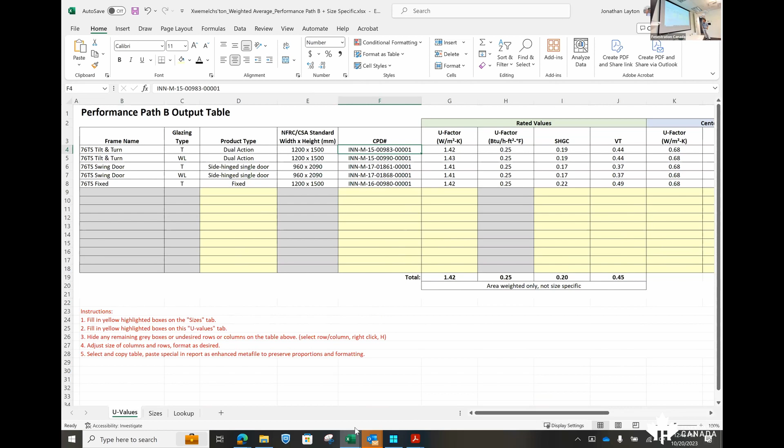This is the old path B version of doing it. We're saying, hey, I'm using the label sizes only. And then it automatically— oh no, not automatically, I had to import, sorry.

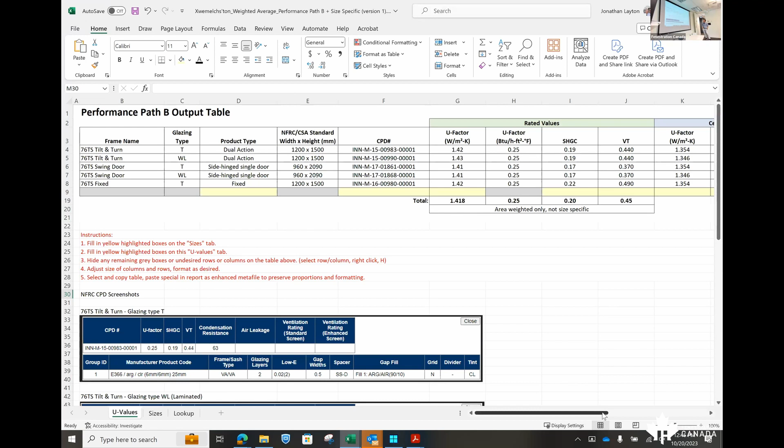I came in here and I put in the center of glass values. The center of glass values, either I'm going to ask my IG manufacturer to provide that, or it's going to come from NFRC, which I generated off here. And so I have those. And then these yellow ones here, this was based on these numbers right here, which, for Stefan's benefit, can be automated.

That doesn't need to come from the manufacturer. Currently what we did was we just took the values from here. I took a screenshot and imported the value for those windows based on the glass that was used.

Then I put in the glass values and it automatically generated the size specific size. We've talked a lot about the idea of taking that CPD number and being able to scrape the data directly in, so you're not putting that in manually. But I think there's ways for us to make the calculator even faster than where it is. Yeah, absolutely.

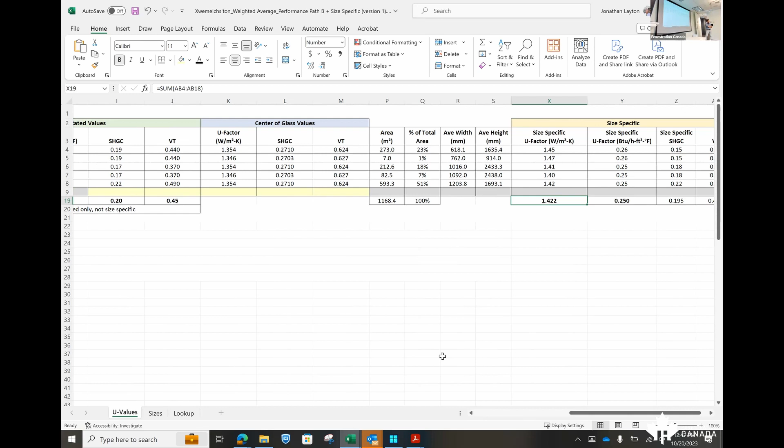A testing number, or CPD means Certified Product Directory. Okay, so it is the certified number. Yeah, which comes from like their models or NFRC.

NFRC, so if you go to NFRC's website for certified products, you can look up the CPD. How do they come up with the numbers? It's physical testing. You send those to NFRC to test it, and then that's a number.

It's an NFRC supplied code for that particular product type, framing type, and model size. It's just a number that they apply, and right now it is physical testing. First, simulations are approved, then they select certain models to be physically tested. If it matches, then they'll create a CPD for it. So it is validated by NFRC.

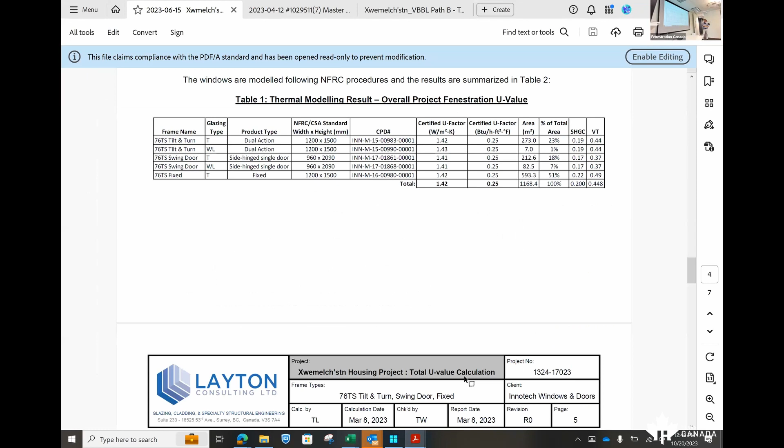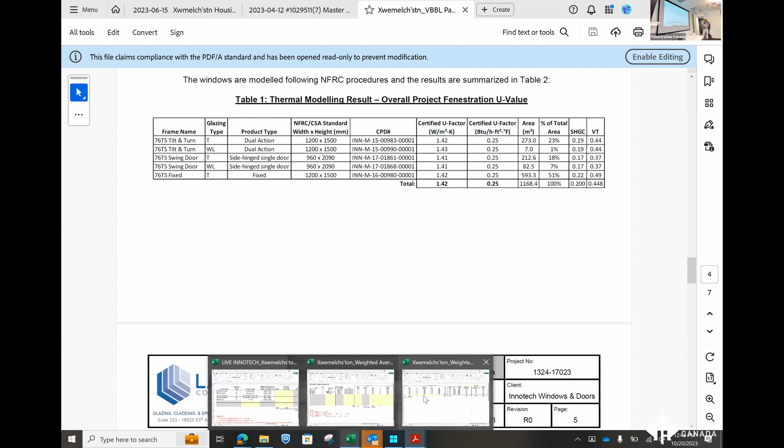And we had created your report, which I won't give all the data for. If it pulls up here, and if I can switch back and forth, like we are right on the money, 1.422, 1.42. Yeah. So let me go back in here.

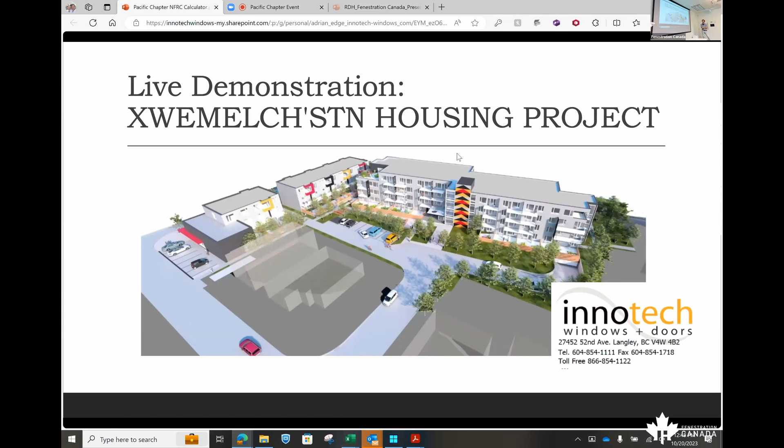And just over the last week, I also wanted to try it on an aluminum project. Unfortunately, I don't have the comparison ready to show you, but I know the numbers are accurate. The one I've modeled isn't a certified product, but I modeled it as if it was, and I wanted to show there was a discrepancy that actually would have favored had I just modeled this.

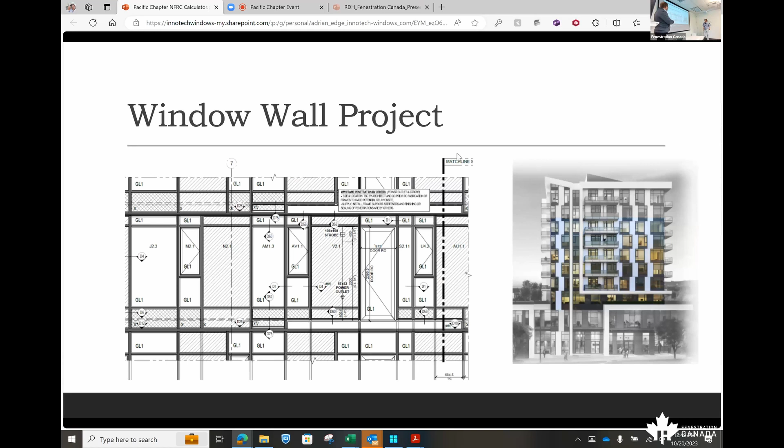The reason I bring it up is I have a lot of small vision areas in this particular window wall, which really hurts that final number. But my actual modeling of this with brute force, the old path C, I am off by 0.8% in total values, and that took me 45 minutes.

0.8% is my discrepancy between what I modeled by really modeling it versus what I had to do since it's not a CPD. But when I put it in as if it was, I'm so close to being accurate to the calculator. It shows that averaging just your label isn't guaranteed to work, but once you put it through the calculator, it's running a linear calculation and it works. So it's less than 1%.

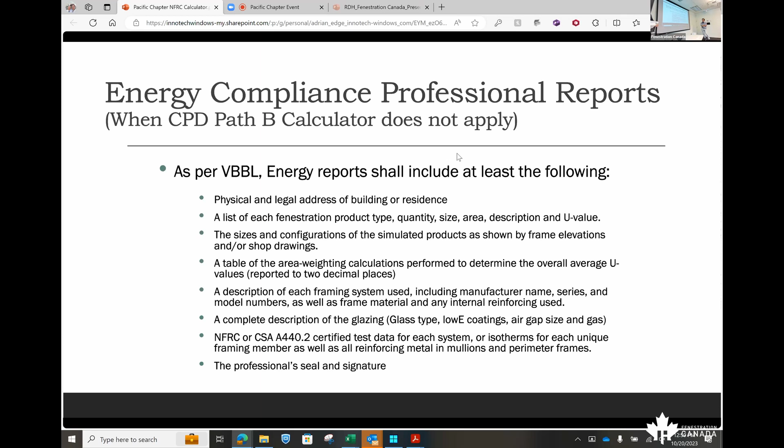This calls back to VBBL. The report I had issued for you back when we were doing it—I do a lot for people who don't have NFRC labeling—there are requirements that still exist. So in essence, we want to provide the tool so it can assist at all levels throughout the construction phase, but if you can't follow that, this path still exists.

This is just an example of one of our reports. I'm still putting all the same relevant information in, it's just I can't use the calculator because it isn't certified. I obviously want more certified products so I can prove the calculator without also having to do the models. But that's it from us, really.

Going back to the question a bit earlier—let's leave it here. This conversation about accuracy is obviously the big question: how are we going to get there? We've gone round and round on it. I think the place we have left is, like what Jomo said, we have to continue to validate these models, keep running them through.

Personally, for a quality control standpoint, if we get to about 35 of the specific models we're looking for as a threshold, I think there's a level of documentation that's needed for us to just be like, hey, by the way, this is about 35 projects of this style that we've done.

Here's the things we found that were outside of that. I personally think once we provided a paper that shows the contrast between these 35 or so projects, I'd be willing to stand on a pedestal and say this is about as good as we could possibly ask for. But this room is filled with a fair bit of engineers, so what do you guys think? Where is accuracy enough for this conversation?

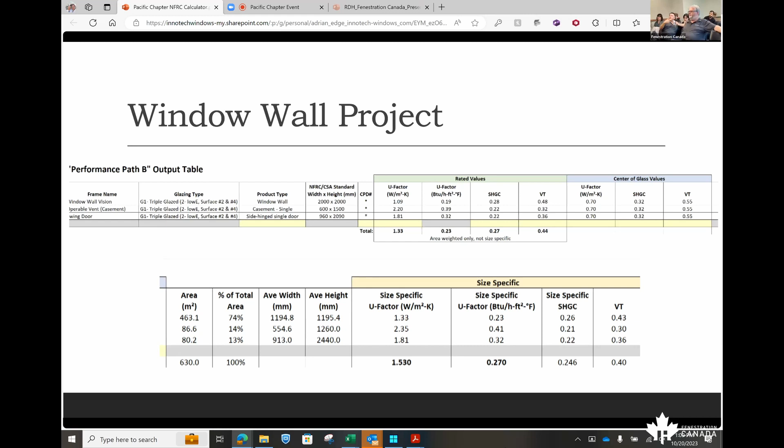Actually gone through, and I think when we talk about overseas products, what we really want to do is make sure overseas manufacturers and suppliers have put all the R&D for North American products, like North America has invested significantly in developing their systems along with NFRC guidelines. And it's not a fair playing field when they come in with alternate values, giving them to clients, but they haven't spent the 30, 50 grand over the last decades in the research and development of their systems trying to meet high performance systems.

They're high performance, absolutely, right. Part of the other challenge is the values that they are marketing are a U value. And architects go, well, your U value is this and theirs is this, it must be the same thing. It's a U value, but it's not, because of how their processes and how they model, and the values they use to model. So that's the bigger issue in a lot of manufacturers' viewpoint.

I'm fighting a battle trying to make the architect understand that my product performs thermally as well, but they're two different values. He's saying, no, this guy's better. Well, no, he's not. No, he isn't, they're using a different process. We just need to change that, that's a challenge, so yeah, getting everybody on the same field.

That's what we're talking about, just get NFRC to change their boundary conditions. Yeah, sure, they'll do that.

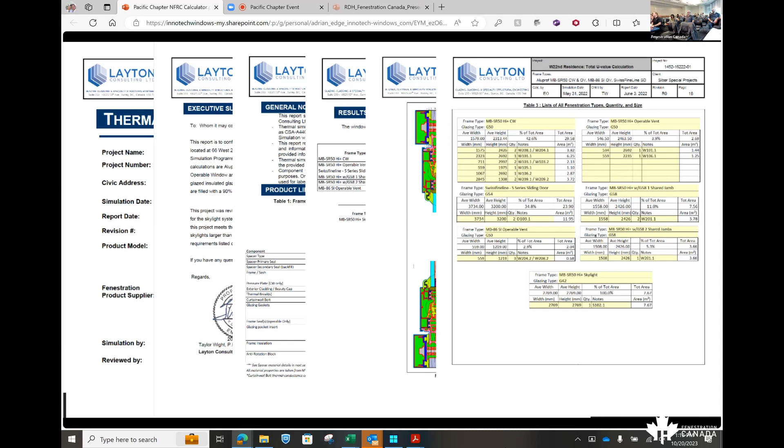Comment with regards to having a link to a database that checks and validates your CPD number - just be aware that your CPD numbers will change every time you get recertified. And the moment that recertification goes through, it's a new number, and the old data is not available on the database. So we run into this right now when somebody buys windows and then applies for the rebate down the road, and in between, the CPD number has changed.

But I think you need to maybe build in a little bit of flexibility, so that it doesn't become very confusing for the user, because they get the number that's on the quotation, and the quotation was from 6 months ago. So there should maybe be some retained historic data for a period of time, and validate against both the currently posted data and the historic data.

We're going to use a CPD value that is no longer certified - that's a bit of a slippery slope too, right? It's funny you bring that up, because actually I was checking your model this morning, and I had updated my IGDB and the glass had changed just slightly. I was like, oh my gosh. Well, in that case, my responsibility, I think, as a manufacturer, is to give you the proper CPD number for what's there now.